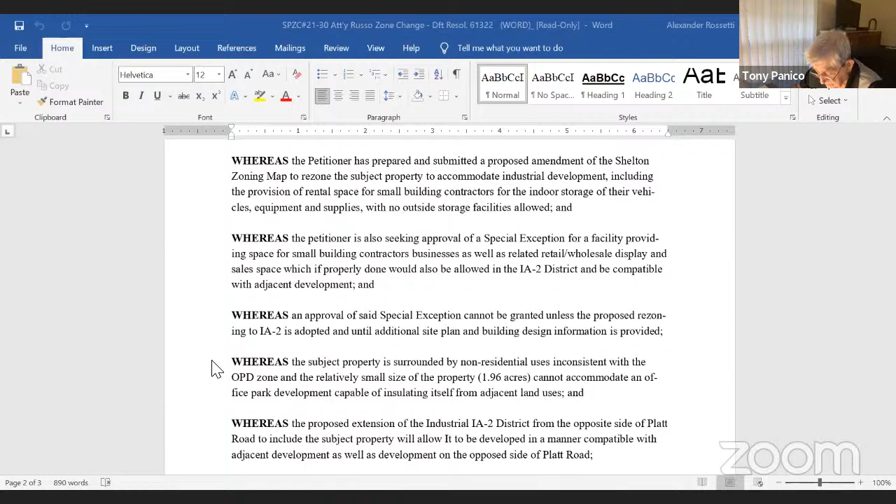And whereas the proposed extension of the industrial IA2 district from the opposite side of Platt Road to include the subject property will allow it to be developed in a manner compatible with adjacent development, as well as development on the opposite side of Platt Road.

Whereas the commission held a duly noticed public hearing on April 27, 2022 to consider said petition, at which time there were no public comments in opposition to the proposed change. And whereas the commission has reviewed the proposed change in detail and is familiar with the site and the surrounding area, now therefore the Shelton Planning and Zoning Commission hereby adopts the proposed zone.

Actually, I got a word missing there. The proposed zoning map change.

Based on the findings noted above and the following specific reasons: the subject site was originally contiguous with other adjacent and vacant properties, also zoned OPD, with frontage on and direct access to Bridgeport Avenue, which properties have since been rezoned to PDDs, with the subject site remaining in the OPD district, yet of much smaller size and with no direct frontage on Bridgeport Avenue. Since the original adoption of the OPD district, the subject property has been underutilized and now has limited potential for development of a high-quality office park. The proposed change is consistent with the comprehensive plan of zoning for the city and with Shelton's adopted plan of conservation and development and its goal of maximizing economic development of industrially zoned land.

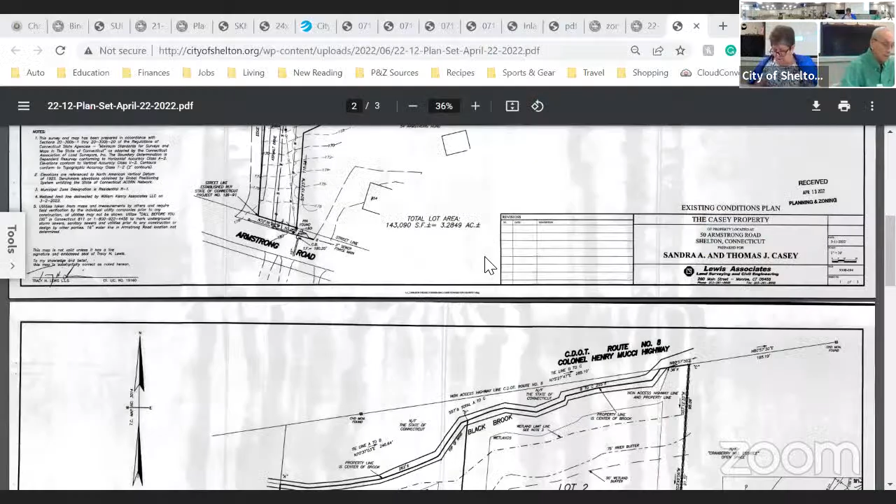All right, so the first is application 22-12. Tracy Lewis for the Casey's at 50 Armstrong Road, Assessors Map 10, Lot 1, on 3.28 acres for subdivision in R1 zone to create an additional building lot.

Is there first a motion to accept for review? Motion made by Commissioner Kelly. Is there a second? I'll second. Seconded by Commissioner Motto. So on the motion to accept for review made by Commissioner Kelly, seconded by Commissioner Motto, I'll do a roll call.

Alternate Commissioner Usal, Aye. Kelly, Aye. Commissioner Motto, Aye. Aye. Goes. Aye. The chair votes aye.

Mr. Rossetti, before we go on, could you confirm for the commission that staff has not found any evidence of this being a re-subdivision? That's correct. Okay, all right. And Mr. Rossetti, according to the agenda, we have it down as accept, review, discuss, and possible action or set public hearing. Could you give us the reasoning for that?

For both these subdivision applications that have been submitted for this agenda, per the subdivision regulations, as most of you are aware, the commission has the discretion as to whether or not a subdivision requires a public hearing. So hence the language saying that you may take action if you wish, or if you wish to send it to a public hearing, you may do so as well. It is not a requirement that it have public hearings, so it's completely up to you.

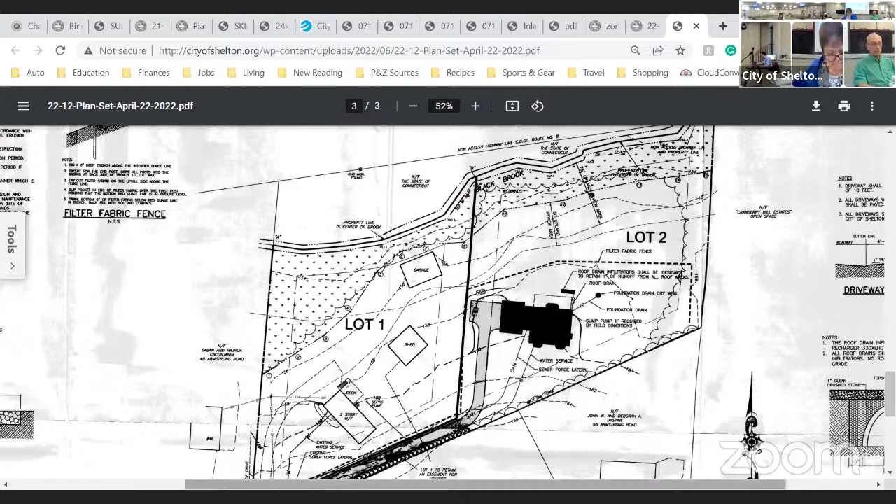Okay, so we can then go ahead tonight and the applicant is present here. So sir, could you identify yourself and state your address?

Tracy Lewis, doing business as Lewis Associates, I'm a licensed land surveyor. My offices are at 260 Main Street in Monroe. I'm here representing Tom and Sandy Casey. Sandy is here, one of the owners is here tonight. Okay, so what would you like to tell us?

Well, you guys kind of told it all already, pretty much, but I'll go through it. It's at 50 Armstrong Road, 3.3 acres. It has an existing house on it already, which is the home of Tom and Sandy Casey. In 2008, they received zoning variances for both lots, 1 and 2.

We received variances for lot frontage, location of the square on the lot, and also a setback to the existing house to the new line for lot 2. These were granted and allowed for two building lots.

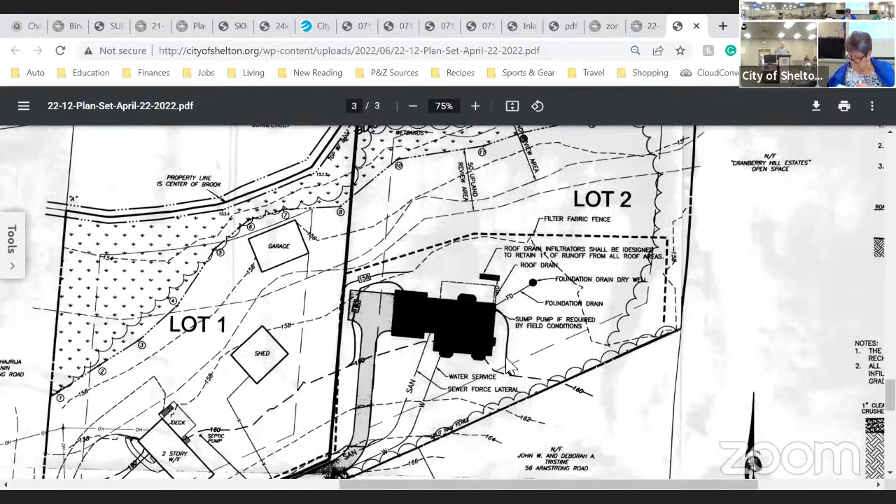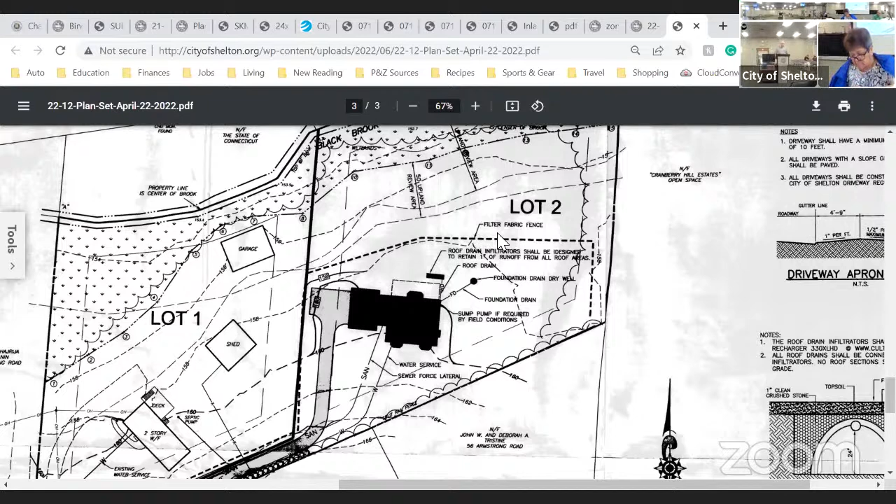Lot 2 will be subject to engineering approval upon building permit. They will need to provide a more detailed site plan, which this one is pretty detailed, but there'll be a more detailed site plan showing the proposed house, grading, and that. Jim did grade it all and showed the proper drainage and all that.

Like I said, it will be serviced. The existing house is already serviced by sanitary sewer and water. So there'll be a new sewer line and water line separate coming from lot 2. We did get the okay from WPCA for the connection, and actually the connection for this lot is already in the road. There is a box out there already for this lot.

We did get the okay from wetlands. There's no wetland encroachment, no encroachment into the wetland setback from the brook. There is an associated limit of wetlands there, you can see it marked. We did flag it and showed the wetlands on the map, and also all the setbacks from the wetlands that are required.

I think that's about it. If there's any questions, I'd be glad to answer them. Okay, any commissioners have any questions?

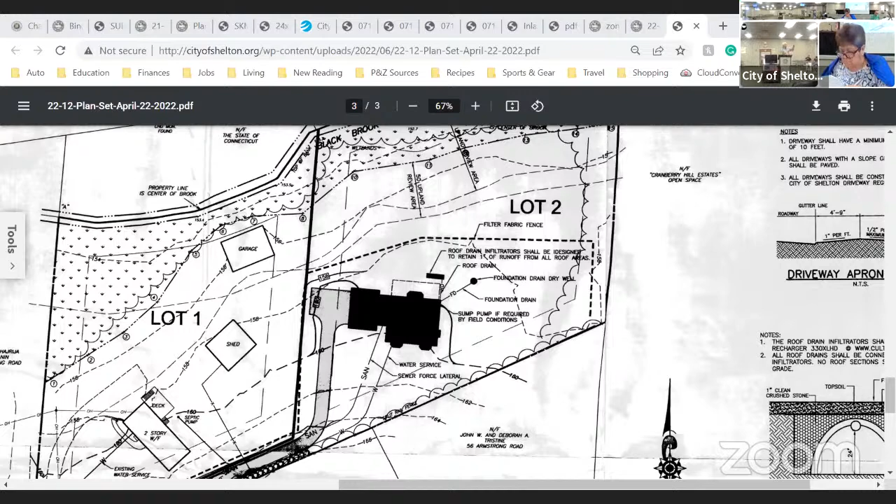One other thing I'd like to mention too, the ZBA approval did require a landscape buffer between the two residential lots to the south, out on Armstrong Road. So if you could tip that up a little bit, Alex, you can see there's a tree buffer between those two front residential lots and the new lot 2. Is that the notation 70 Lynwood Gold Forsythia?

Okay, Commissioner Kelly has a question. Just looking at it, it says... where's the driveway for that?

So there would be a separate driveway that would go to lot 2. The existing house obviously has a driveway already. Okay, so there'll be a new driveway for lot 2. And there's another drawing that says lot 1 to retain...

easement for utilities. Right now the sewer line and water line are in the area of the lot 2 property, so we would reserve an easement over that area. I was wondering if that easement was to bring utilities to lot 2, where would the driveway be? But that's the opposite of what it is. Okay, thank you. And it would not affect the buildable area or anything else? No, absolutely not, I agree.

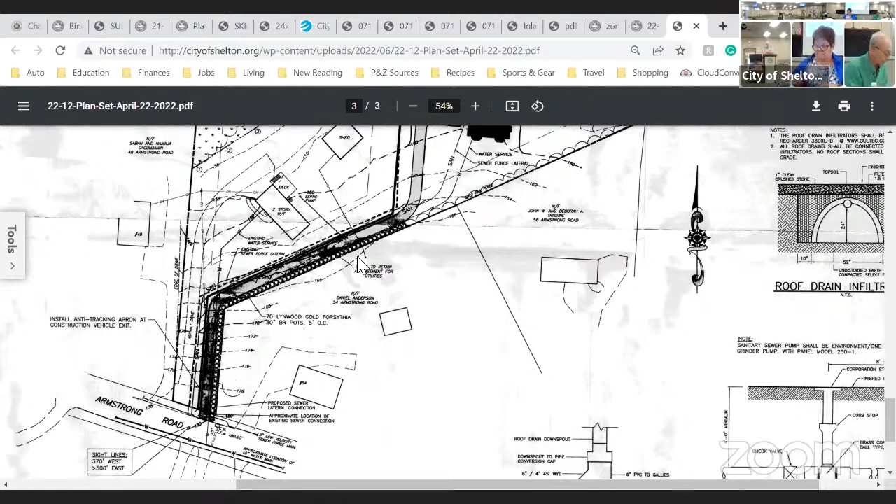Any other commissioner have any comments, questions, or concerns? Mr. Panico, how about you? Yeah, I had a couple. I haven't had a chance to discuss this with Alex yet, so I don't know some of these answers.

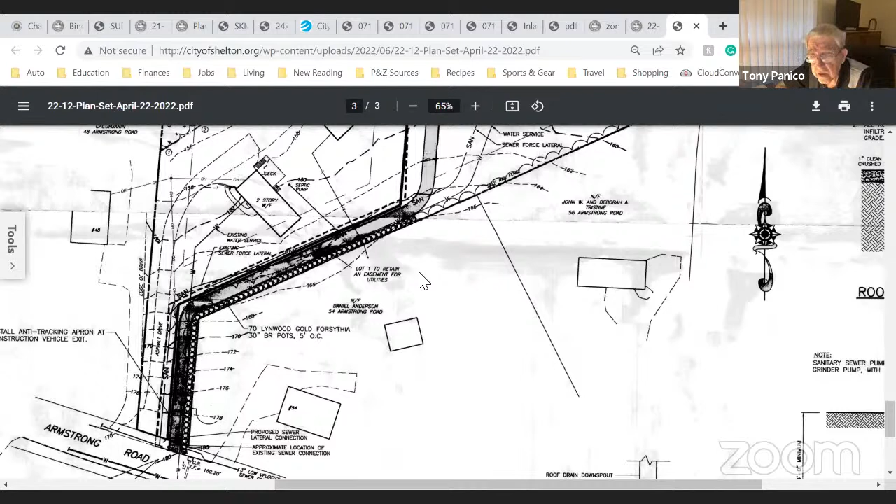Does this require a fee in lieu of, or open space dedication, or anything? I can't remember the specifics of the requirements. And number 2, does it need to go to Conservation Commission? We normally send them subdivisions, even 2-lot ones.

And number 3, the driveway - I know it doesn't meet the length requirements to mandate a bypass area, but in view of that sharp bend in the driveway, it's conceivable you've got somebody coming in and somebody leaving without realizing it, and somebody's got to back up with no opportunity. So I'd suggest that where the second bend on the driveway is, perhaps a fishtail be provided there so somebody could back out of the way and let someone by, unless there's room to put a widened area where two cars can bypass. You don't want to have somebody backing out onto the street.

Normally in a shorter driveway, before you pull in, you can see if there's somebody on the other end of the street, but in this case you can't. Exactly. Okay, we wouldn't have an issue with that.

So those would all be made as a condition of approval, Mr. Panico? Yeah, that certainly could be a condition of approval. Also, the final comment I'd make - I don't know if it requires input from conservation, but it might be desirable to create a conservation easement along the wetland area. It's excess and not going to be used anyway. It doesn't penalize the applicant, it just protects the brook.

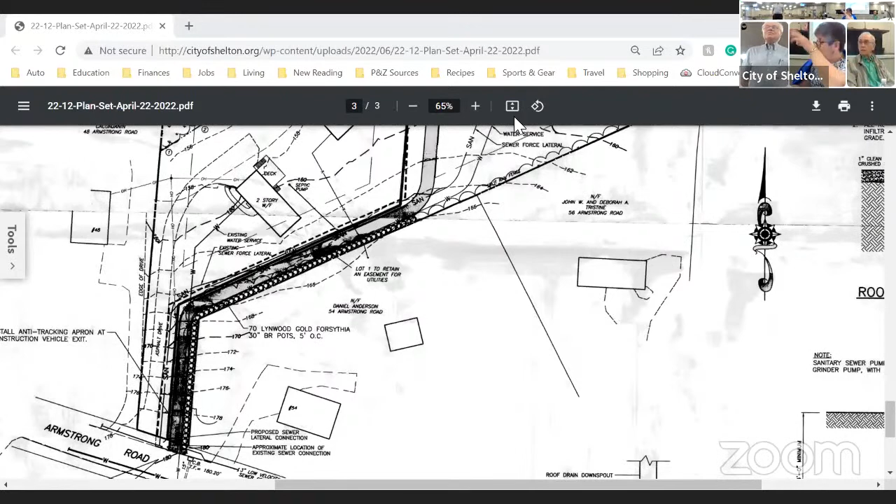Alex, they want you to slide the diagram down. Is that better? So lot one owns it all. Correct, that's what I assumed. Things on theirs, and the whole property is theirs. Right, in the back, lots 1 and 2. Not in the front where it says formerly of Anderson, those aren't theirs. No, we know that. Okay, as long as there's no confusion about whether it's a re-subdivision, and no issues with conservation, then the points I brought up are the only concerns I'd have, and they're easy to clarify.

There will be a fee in lieu of, and apparently Inland Wetlands has indicated no need for an application or whatever. So a conditional approval could be acted on if that's what the commission wants.

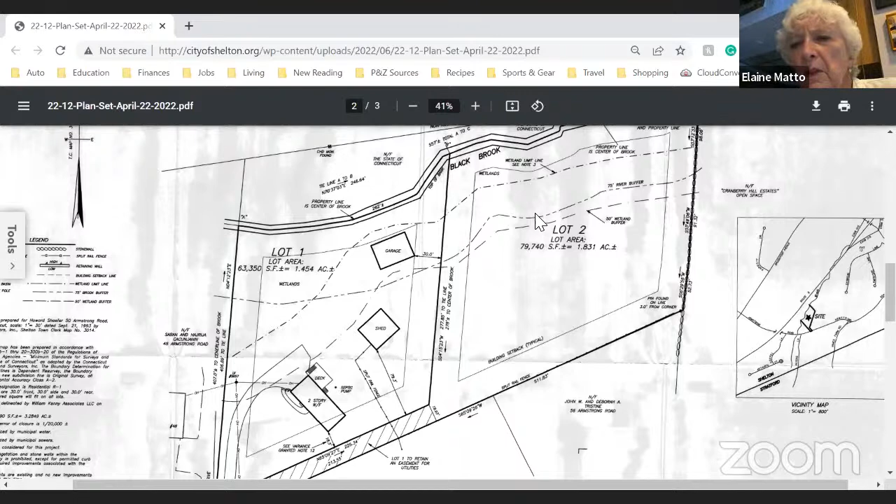Tony, would they have to redraw the map a little bit to accommodate that driveway change? No, that would be an easement on lot one. We'd just expand it. That's in fee on lot one. We wouldn't change the lot lines, wouldn't be necessary. We'd have a wider driveway. We'll widen it at that corner and make it wide enough so somebody can turn.

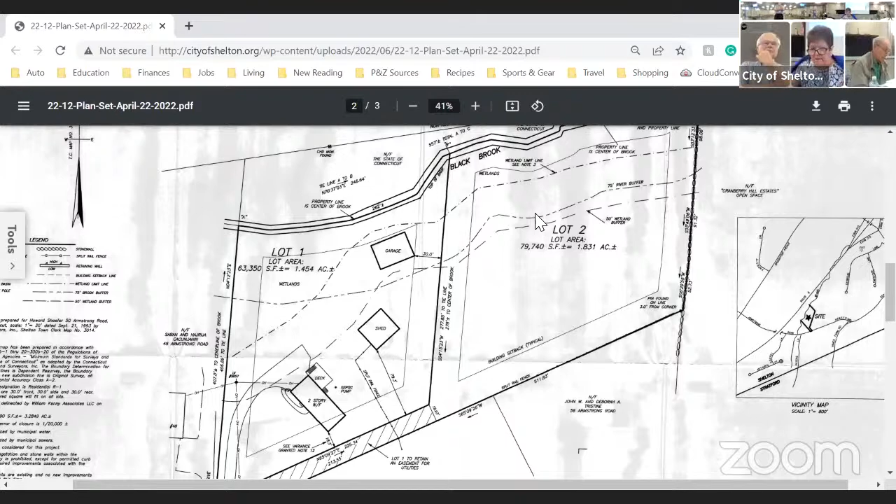What's that, Commissioner Kelly? My concern was somebody exiting from lot 2 having a conflict after he makes the bend. How do you deal with it? I think Mr. Lewis was saying they'd have an easement and a wider driveway, a little bit wider. Can we go down to see the entrance again? You want the maps moved again? I'd like to see the entrance. I don't know what we're talking about.

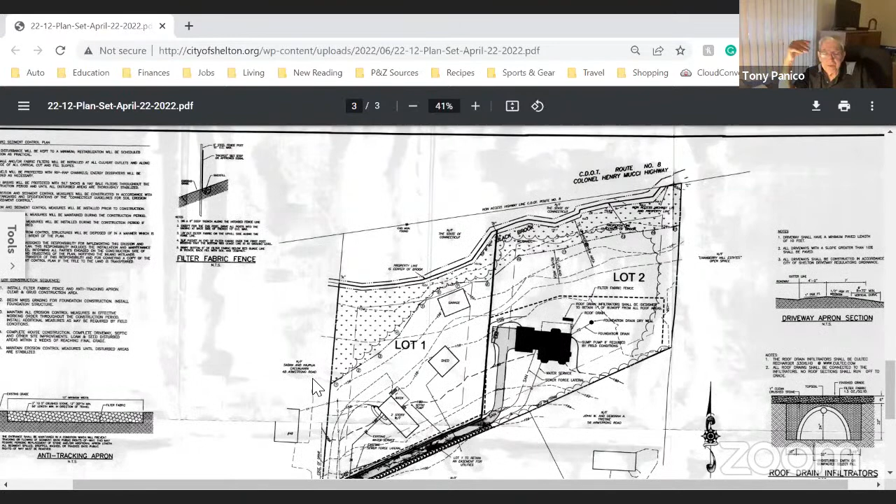So, are you going to have two parallel driveways there? Yes. So you're talking about somewhere before the curve. I'm talking about somebody that wants to enter lot number 2, make it a little wider, and drives down that grade. Then all of a sudden, as he turns the corner, he sees somebody in front of him. Like where it says asphalt drive, right there, make it a little bit wider so somebody could pull off. There's room? If we'd have room, that's fine, but we could do that.

All right, any other concerns from any of the commissioners? All right, so does any commissioner want to make a motion for conditional approval of application 22-12 with the points that Mr. Panico brought up: the fee in lieu of going to the Conservation Commission, fixing the sharp bend at the beginning of the driveway from Armstrong Road with a pullover, and a conservation easement along the rear of the property, as conditions of approval?

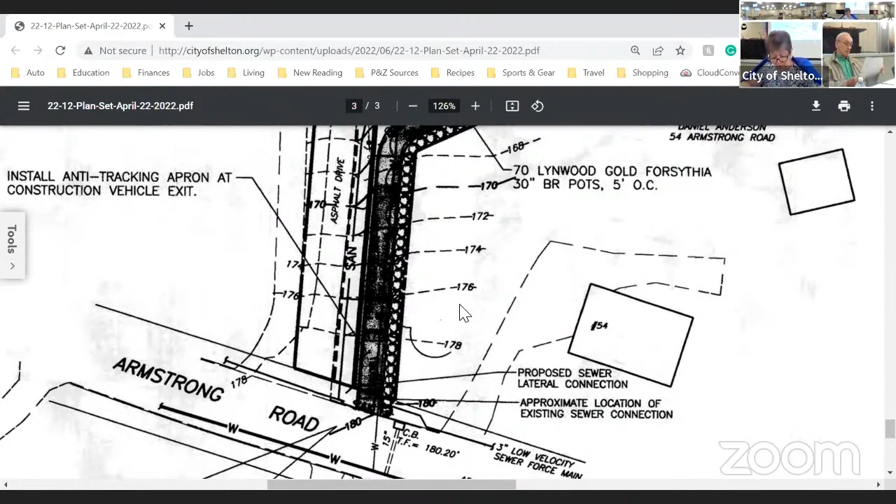I'll make that motion. Okay, Commissioner Kelly is going to make that motion. Is there a second? A second from Commissioner Matto, seconding. So on the motion for conditional approval from Commissioner Kelly, seconded by Commissioner Matto, I'll do a roll call vote. Commissioner Kelly? Aye. Commissioner Matto? Aye. Commissioner Lascos, you there? Aye. Commissioner Tiki? Aye. Alternate Commissioner Usel? Aye. And chair votes aye. Motion for conditional approval passes on a vote of 6-0.